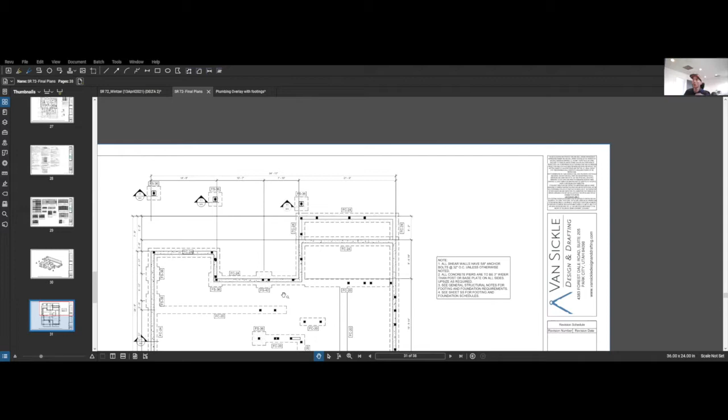As I discussed in one of the previous videos about the excavation and site work, division 2, we had a couple of issues with the footings that allowed us to pick up some space and storage. Let me show you really quickly.

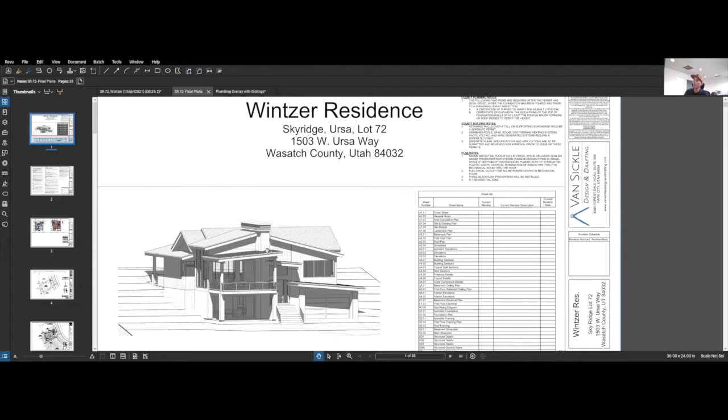I'll be showing this throughout the whole project. Here's the house, lot 72, Sky Ridge, Ursa Way in Park City, Utah, which is actually in Wasatch County, about 4 miles outside of Park City. That being said, we'll jump right into the site work portion.

So we're going to go to the site plan. One of the things this architect has done, which I really like, is an isometric foundation drawing—that's what he calls it, I call it a 3D drawing. Here's our garage, and we're coming into the garage right here.

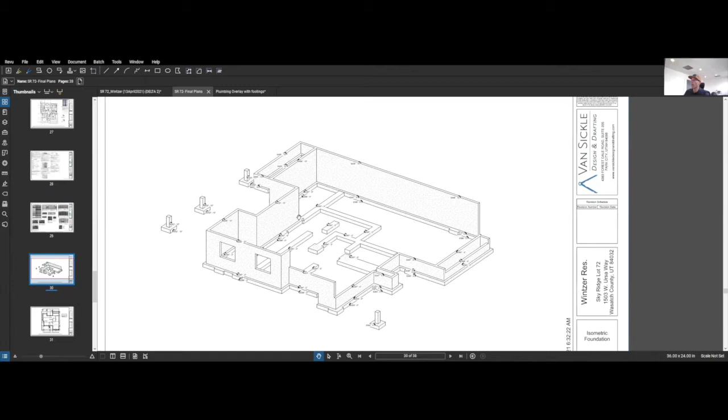As you come in, you enter into the mechanical room. The mechanical room is basically this wall right here, boom, boom. With that, there was this random little crawl space area with a step up in the footing and all this stuff, and it was just empty blank space for no reason.

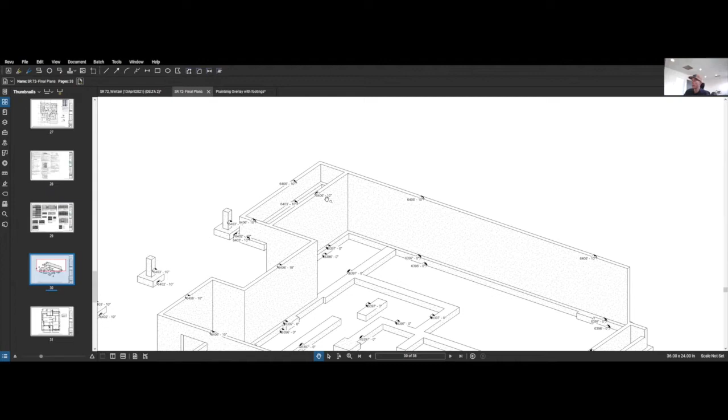We're already excavating the back wall, which is load bearing for the exterior of the upper guest room, so we're already going to be digging that with the footings. In addition, we're forming this wall right here, pouring concrete, and excavating this as well. What a waste—this wall doesn't contribute anything to the project.

So currently our mechanical room is like 8 feet 6 inches. This is the mechanical room right here, this is that wall that's unnecessary, and then the back wall with the footings.

So what we requested with the architect and the engineer, which they agreed upon, is we deleted this wall right here, so we no longer have this random crawl space. What we did is we picked up an extra 5 feet by 21 feet of mechanical room, almost 22 feet. That's an insane amount of storage for bikes, skis, camping gear, whatever the owner of this house is going to take. We just opened up the mechanical room by that amount of area.

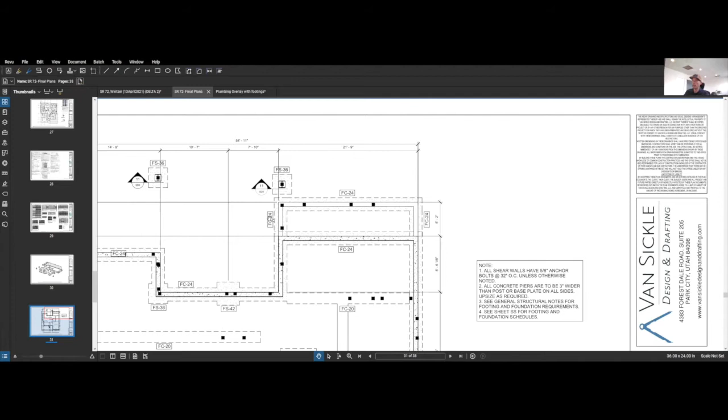When you think about it, that's a lot. So bopping right over to this is the delta that the architect changed—you can see we deleted that wall. In construction drawings, when anything's clouded, and most of you might already know this, but I'm going to share what I know, anything that's clouded is a change to the drawings.

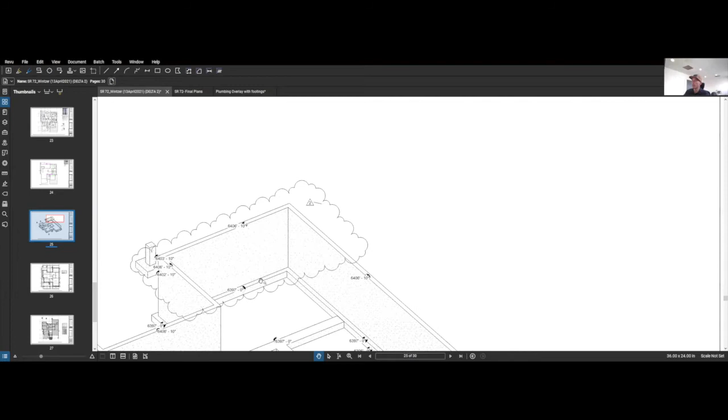Or a call out, so recognize that. And then when there's this little delta here, that's the first revision, delta 2 revision—that's the first revision in the drawings. So we do that, and boom, see, it's eliminated.

That's big—now all of a sudden we went from an 8-foot mechanical room to a 13-foot one. We just picked up an extra 5 or 6 feet by 21 feet. That's a big difference in that mechanical room, and it's going to make a huge difference to the owner in their day-to-day.

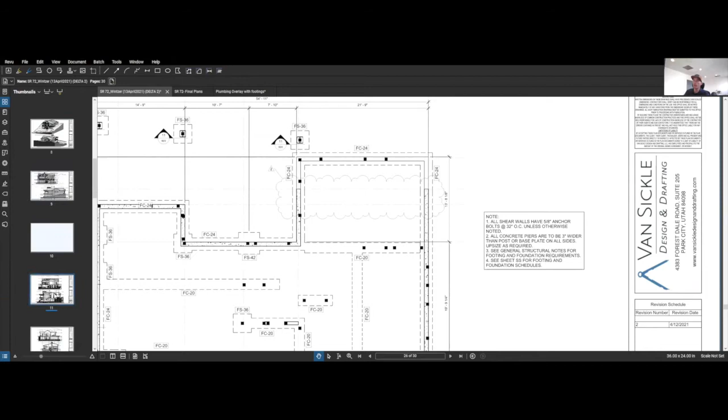Let's see if I can find this. Yeah, look at this, let me show you—I'm gonna bounce around for a second. So this is the very first one, this is your mechanical and storage. Just visually look at this.

See kind of, and then we're going to the delta, the change—look how much bigger that is. That's an insane amount of storage that we just picked up, and at no cost. It's actually probably cheaper, since we don't have to build that wall, form that wall, or pour that wall, and we're already doing this wall. So we just picked up free space basically.

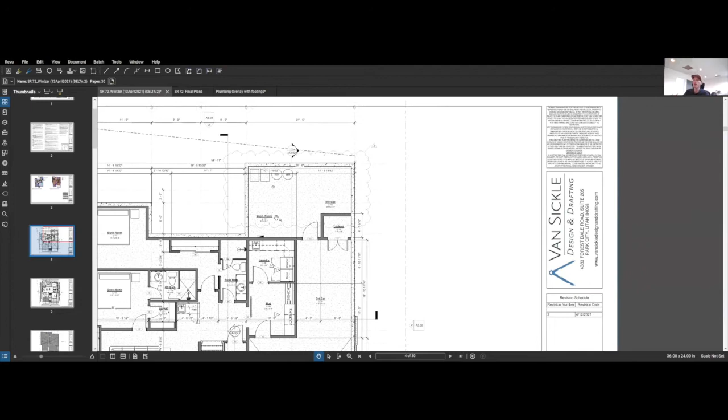So those are little things that, throughout the project, we're hoping to do as we go along.

Another thing we noticed as we were doing this footing drawing: right now the elevation of this floor right here is 6396.10, that's the elevation of the garage floor. But if you go here, this little wall right here is 6397.4. 6396.10, 6397.4—that doesn't make sense. We step up and then drop back down in the driveway.

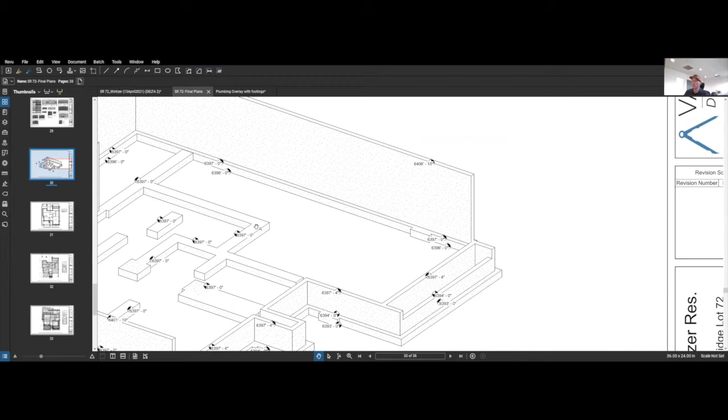So this is one of the things we're having the architect eliminate as well, so it's a clean little drive-through on that. So those are some of the things as far as the footing and foundation that we've worked on thus far.

Another thing we've done, and this is something my dad taught me, is you've got to find your toilet locations. Your toilet stub-ups are a bigger portion of this than you'd think, and they need to have direct flow directly to the sewer and all that stuff. So with that being said, this is going to look insane right now.

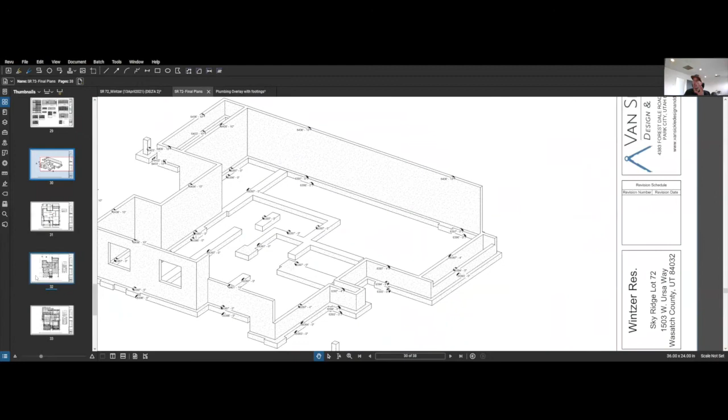If I zoom in on this, everything in blue is the footing drawing. I took the footing drawings and overlaid it with the plumbing drawings, the interior drawings of the house. So as you can see, the red is the dining room, the pantry, this stuff. The red is on top of the blue.

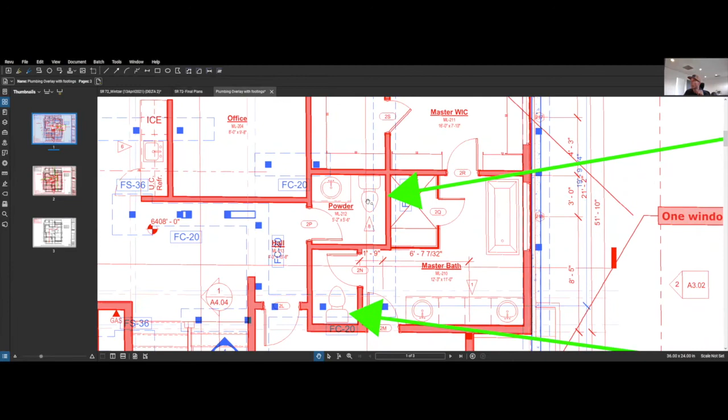Everywhere I have an arrow, you can see there's a toilet, and that toilet goes through a footing. Now this is the upper floor, so it's not as bad, they can run these pipes up through a wall. But in the basement floor, which is concrete, you can see where this arrow is. The black is the footings, so this toilet tank goes right through this footing.

That being said, that's a big thing. So what we're going to do is take a line right here, make it 4 points so you can see it easy, and make it bright blue. So we're going to take this footing, which is the black. You can see the footings are right here.

So I'm going to take this line, and when we get with the footing and foundation team we're going to say, hey guys, form the rebar all the way through this footing right here, but I want you to block out this section. Pour the footing here, but do not pour the footing in this section right here. This is a sacred section, we don't want you to touch it.

And so we're going to leave that open. There's rebar in there, but what it's going to allow is the plumber to come in and stub up this tank right here for this clean out of this toilet. So he's going to stub that location up, which is going to make his life a lot easier.

Then we'll leave that open, and when we come back and pour the entire foundation of this building, we're just going to fill in that footing gap with the foundation. When we do all the flat work, we pour the slab, we're going to fill that footing in with the slab. So that's how we're going to combat this.

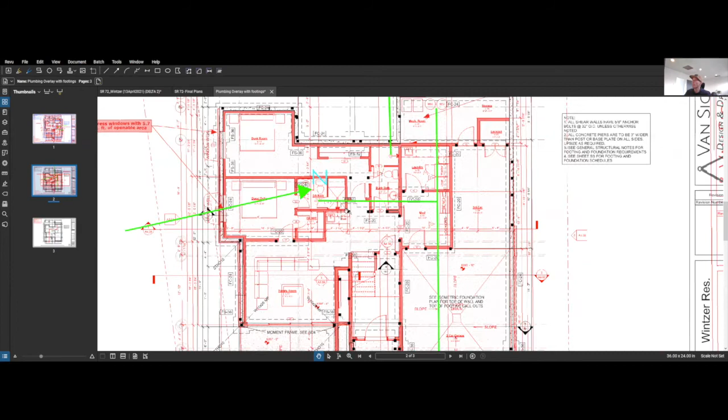And then lastly, this subgrade, as I showed you out on site, is super rugged, it's really intense. And so for a plumber to come in and hand dig this with a shovel to trench his underground utility work for the plumbing, it's going to be hard work for him.

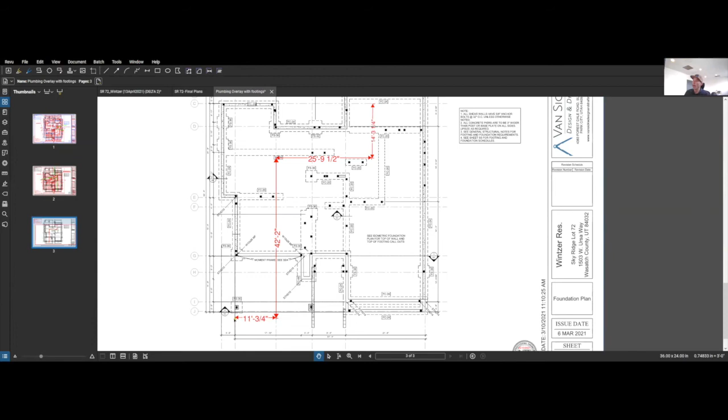That being said, I gave the plumber a call and he asked me if I could put a 6-inch sleeve in. So we're going to go in with the excavator because we already got the tools there and we've marked this out. The biggest thing is we got to miss this footing. Our mechanical room's in here, so we're coming off the sewer lines right here, and we're going to mark it out.

And then we're going to have the excavator just boom, lay a sleeve for this guy. This guy gets on site and we've already laid a sleeve for him. That's labor and time he's going to spend, easily half a day if not more, probably a full day's less work built into our job by doing this. Yeah, we're going to pay the excavator for doing it, but for them to pull that trench it's one swipe versus this guy taking a whole day to do that.

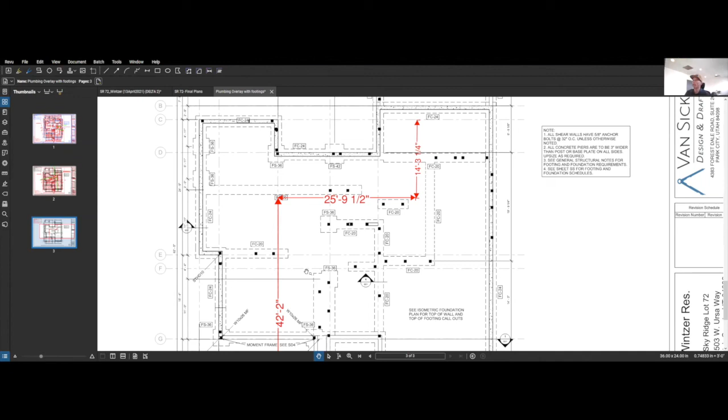So these are little things we're doing throughout the project to help with that. Here we are with footing foundation, and that's where we're at. Stay tuned, I guess that's it for this video as far as picking up the extra space, the location of the toilets, and where we're at with Division 2 as we roll into concrete next week, Division 3.